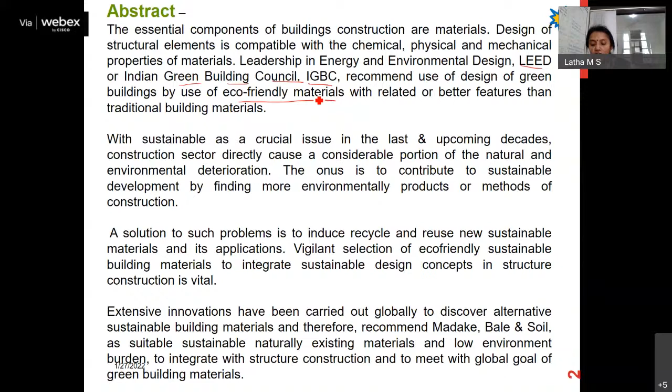Okay. My presentation is divided into 3 parts. So part 1 is with respect to Madake, or bamboo. Why this bamboo? Where has this bamboo come from? It's a plant which will absorb carbon dioxide and emit a lot of oxygen.

But it is not only the property of bamboo. It can be used as a construction material. So going with this, we have experimented for college institution, right? So the overview of the presentation is talking about all the parameters influencing bamboo usage for construction purposes, and how we can substitute construction material using bamboo.

Now, as you know, concrete and steel play a major role, because without concrete and steel it is not possible to go for any type of construction.

Sorry to interrupt, sir, there is an echo formation. Am I correct? Sir, there is an echo formation. Madam, please tell me. Echo formation. There's an echo. One second.

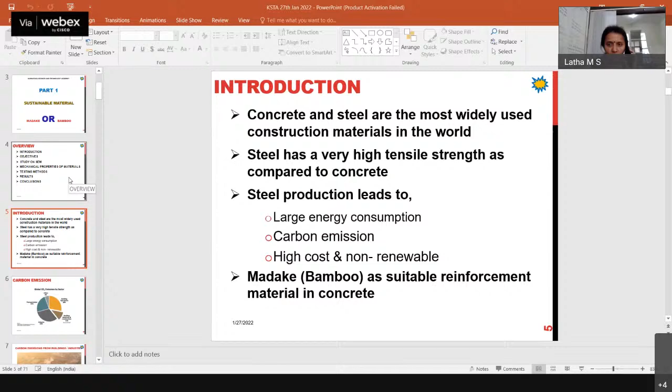Now coming to the topic of introduction, I was talking about concrete and steel, how concrete and steel play a vital role in carbon emission. Concrete consists of cement, aggregates, and sand. The cement is a major culprit in emitting carbon to the environment. And even the steel, when the production of steel takes place, during the process, you find...

Hello, sir. Okay. Okay.

During the process of steel production, you find a large amount of heat and environmental warming emitted to the environment, which is causing a high impact on the global environment. Though we know that steel has high tensile strength compared to concrete, we have to use it.

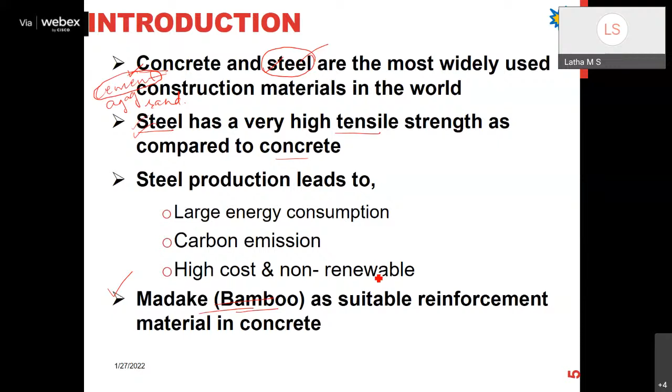But today in this generation, students, do we have a substitute for concrete and steel? Everyone knows concrete is emitting a lot of carbon, and steel is also emitting, but do we have any such substitute? Yes, of course we have. We call it Madake, or bamboo. Bamboo is a highly versatile material which could be used in place of reinforcement.

Coming further, now we can see this chart, comprising transportation, building operations, building materials and construction, and industry, and the amount of carbon emission being given out. Transportation is 23%, industry is emitting 32%, building materials and construction is emitting 11%, and building operation is 28%. Totally, you can see more than 70% of carbon is being emitted.

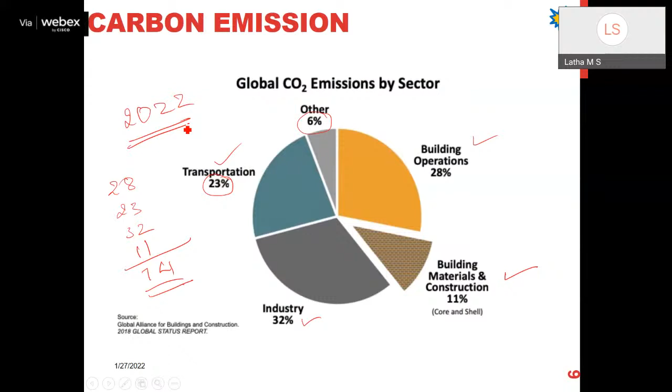So we have to think about how to overcome that and how to replace such a material. Not completely, but definitely a partial replacement is possible. Now we are talking about cement. You can see this is cement, you have a physical view also. These are the cement bags, and this is the cement plant where the manufacture of cement takes place.

So tons and tons of cement have been manufactured. At the same time, tons of carbon are being emitted to the environment. If I manufacture one bag or 1 kg of cement, it will produce an equal amount of carbon to the environment. This is a fact.

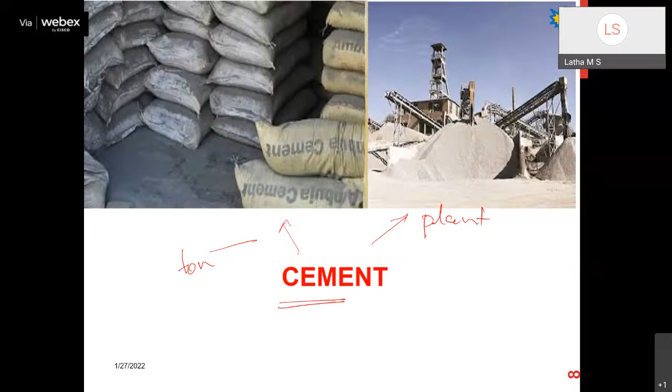Even now we can see this is a reinforcement. When I split this reinforcement, that means I'm providing a support to the cement. I cannot use cement alone for the construction. I should be reinforcing with the bars. These are the bars you can see - this is a reinforcement. A lot of cement bars are being used.

How is this manufactured? Is that readily available in the market? We pay and we get it, students, but it is not that simple - we have to look into the manufacture of it. It is very, very important. So to understand the manufacture of cement, manufacture of reinforcement, how much carbon is being emitted, we have to understand this.

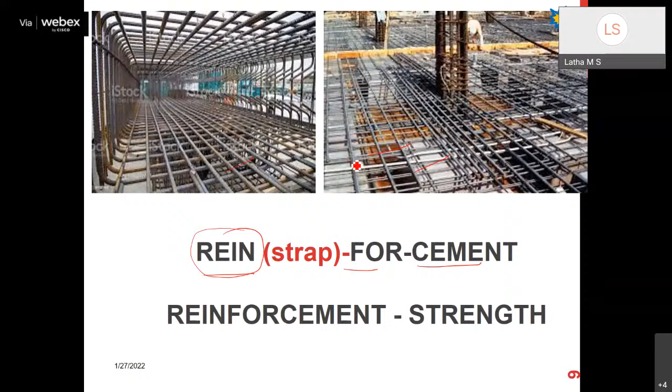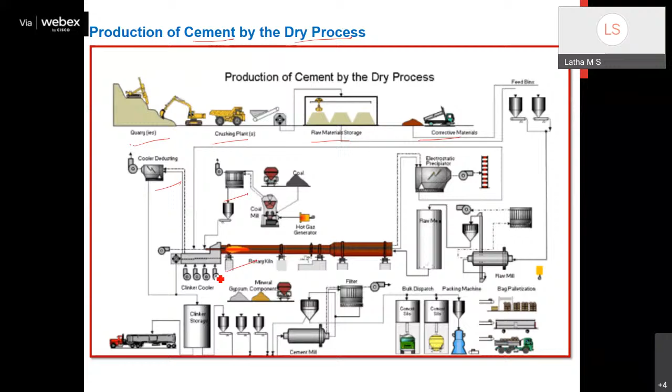Now this is a process telling about cement production. Cement can be produced in two ways, as a dry process. Whatever it is, dry or wet process, I'm not worried, but see the complete picture, students. You can see there is a lot of content involved - you have a quarry dust, a crushing plant, then raw material. Everything takes place, every setup has to be made, every equipment facility has to be made, and manpower is required. A lot of energy is required here to produce the cement.

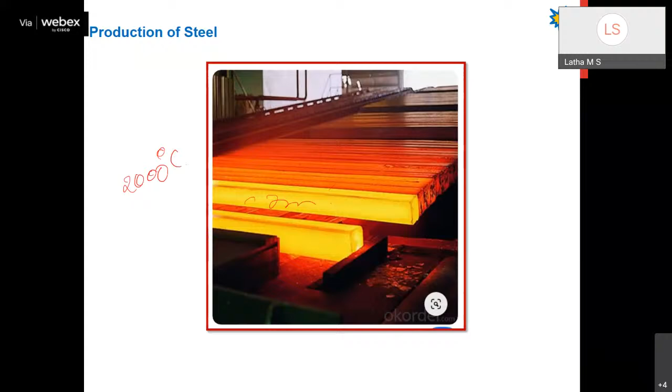So it's not easy for the steel to bend because of its high strength. So we have to bend, heat it to the molten condition - it will be more than 2000 degrees, more than that, then only it is possible to bend the steel, right? Similarly, you can see the operation in the steel production industry, where the person is standing here working, associating with the job to function for the manufacture of steel.

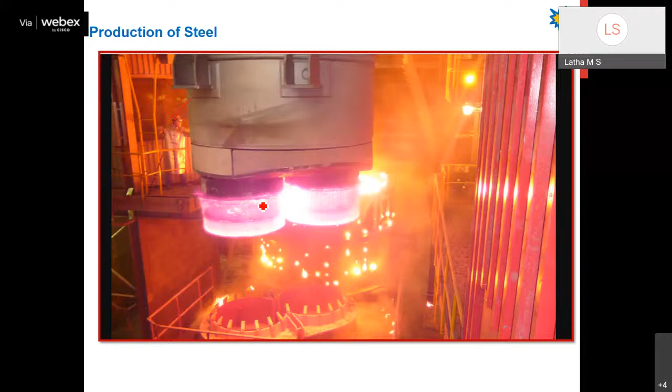So what we understood from this, finally, is that cement production and steel production involve a lot of energy.

How to overcome this? Yes, there is a natural material called Madake or bamboo. I'm not telling you that Madake or bamboo will completely take up the role - no, no, no, it's not possible like that. We have to partially replace it wherever it is possible.

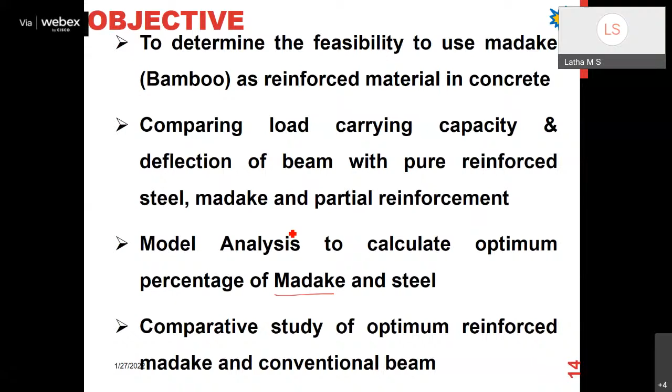Bamboo we cannot use as it is for construction, right? We have to test it. So this is a source I have taken from one of the literature available. The bamboo, in dry condition, will be cut into a piece of the required height, and it will be tested in the UTM machine, that is the universal testing machine. After that, the tensile strength will be estimated and put up across a stress-strain graph, showing that it has achieved a very good strength.

Similarly, when I say bamboo, you will have a mind that it is a wood material - yes, definitely it's a wood material. So for which we have to take the strips, cut the bamboo into strips and soak it in water. Just by soaking the bamboo in water as it is, I could find the water absorption to be 51.2%, which is very, very high to be used for construction purposes.

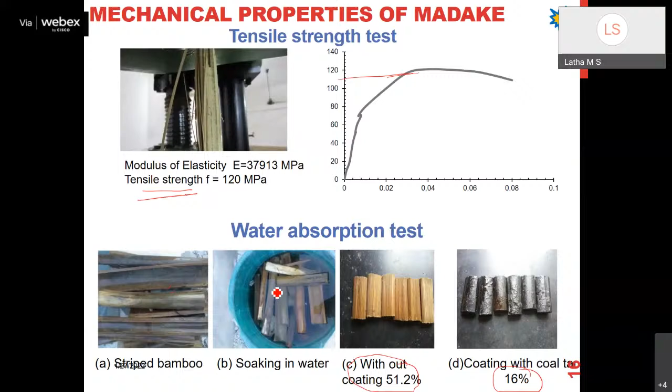This is a reference we took from the literature survey. A number of Indian standard codes are available with us, specifically IS 9096 and IS 8242, which indicate the best features of bamboo and the methods of test to be conducted.

Once I treat the bamboo with coal tar, what happens? The coal tar has some temperature within it, and this coal tar will make the cellulose dissolve. So you find a good layer being formed.

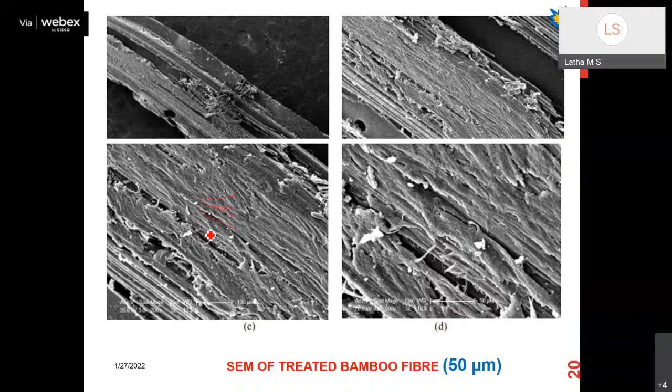So to overcome that, we started treating the bamboo, and these are the observations we made. Significant modification after treatment: the starch material in the cell cavity got dissolved, and the cell wall was intact. Intact means it will be strong. So this is a study we have made.

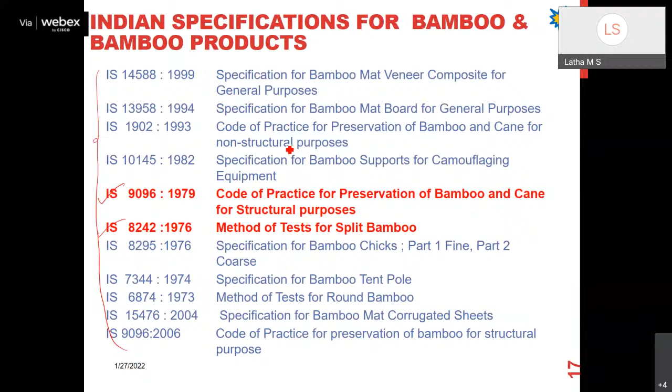So regarding bamboo: how we started collecting the bamboo, then we studied the strength of the bamboo, then we had to refer to the codes. It is not that easy, students, to just use some XYZ material and do it. No, no, no - we have to really investigate the material before using it.

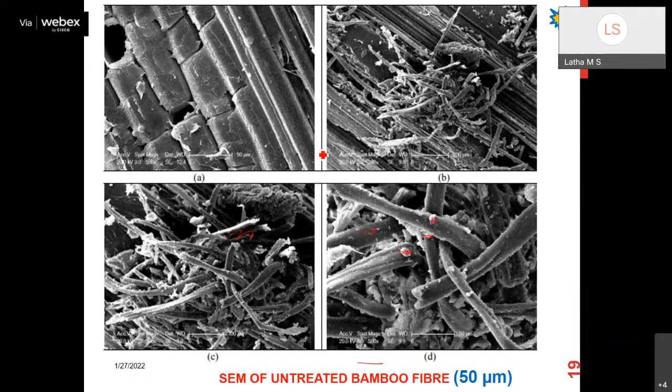Then we have to go for SEM scanning images, then we have to treat this cellulose - the treatment was coal tar - then we proceeded with the application.

So we made a collection of the required number of bamboos. One species was available - don't worry, any species can possibly be taken up, but it is on a trial and error basis.

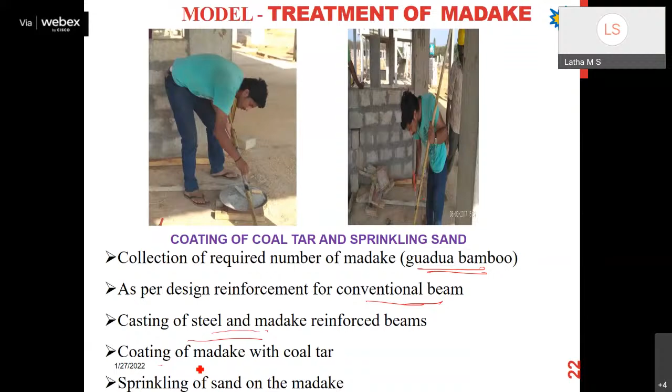Then we designed the beam, then started with the steel construction, then coating of Madake with coal tar - Madake is nothing but bamboo - then sprinkling of sand took place. This is the final version of the treated Madake, so this is what you can see.

Where was the bamboo? Bamboo was long back - this was the bamboo we could see. This bamboo has been changed into usable bamboo as a structural element by treating it with coal tar.

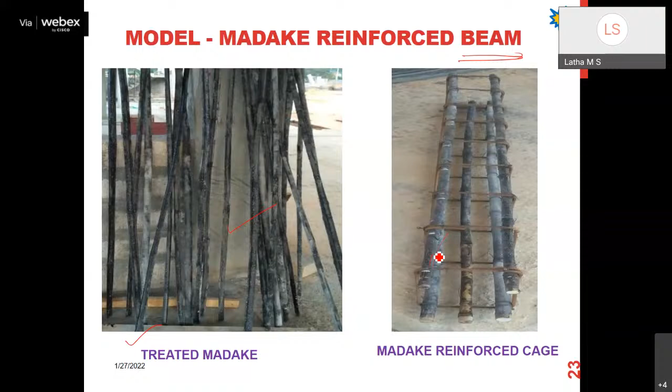By treating it, then we prepared the cage for the beam. You can see the solid bamboos are being used in place of reinforcement.

After this, we also have a comparative study with the ordinary conventional reinforcement. So you have two different types of reinforcement - one with bamboo and one with steel - so my study has to conclude while making a comparison. Any study, students, you take, you have to have a comparison with the conventional type.

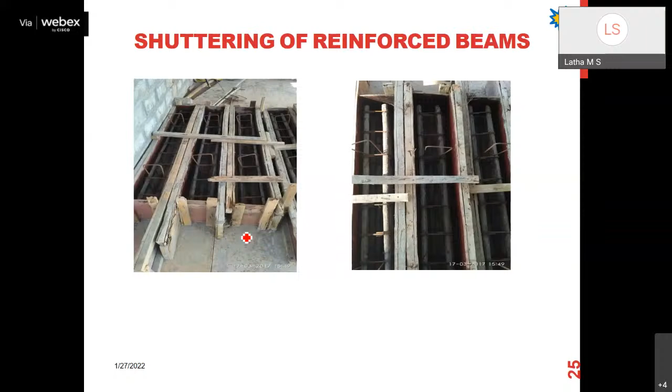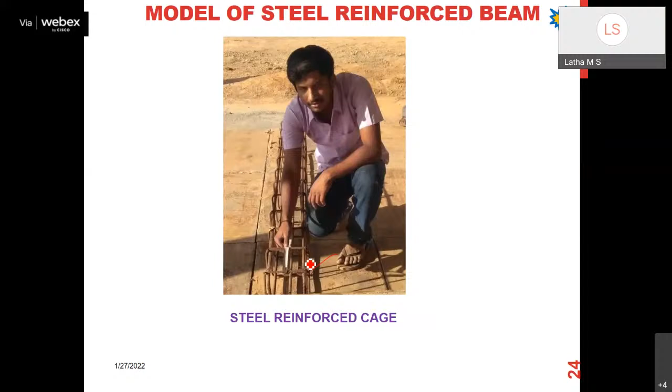It is not simply enough to say that bamboo can be used; we have to show how it can be used. So this is a beam which we have cast. Similarly, using bamboo as stirrups and using steel stirrups, we have cast the beams both with bamboo and with only steel.

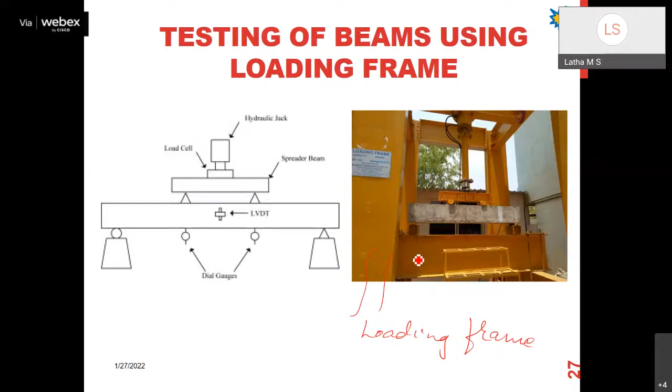Then after that, the process doesn't stop. We have to test and tell people what the bamboo is doing. So this is a loading frame, students, which will take the maximum load for testing. We can test beams, slabs, columns using this loading frame. So using this, we started testing.

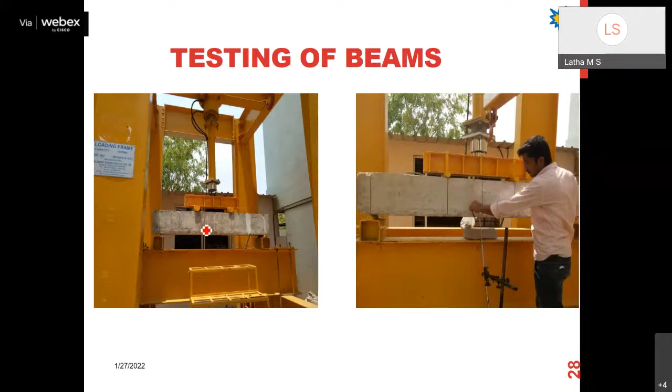You can see the arrangement made. You can see the student making the arrangement. It has to be centrally placed, symmetrically and centrally placed. Remember students, this beam is composed only of bamboo as the reinforcement, not the conventional steel type.

Now the load is being applied. You can see the failure has completely happened, very nicely, exactly the type of failure as steel would show. You can see here the bamboo is still intact here. Bamboo has not failed, it is still intact.

So it can take up the load even more, being intact. Now we have to proceed further. This is with respect to the bamboo cage. Now we have to proceed with the steel cage. Two types of studies we continued.

So a beam was cast using only the steel cage. Again, it was applied for loading using the loading frame. Then the failure pattern can be observed; it was all similar for both bamboo and steel. Both had an equal type of failure. Then a plot of the graph was made.

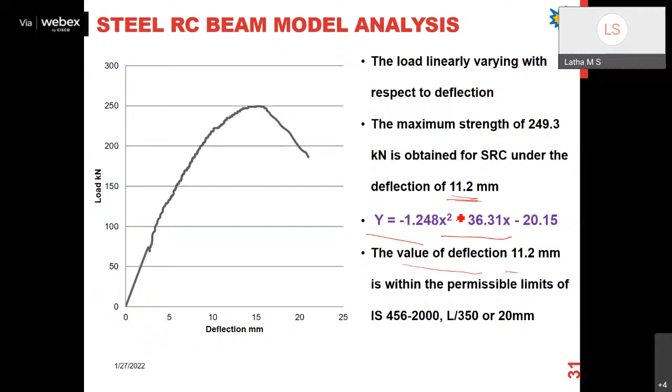Analysis was performed and the equation was derived, telling us the maximum deflection, because we saw the bending - it was bent, meaning deflection was happening. So what is the maximum amount of deflection? It is 11.2, which is within the permissible codes.

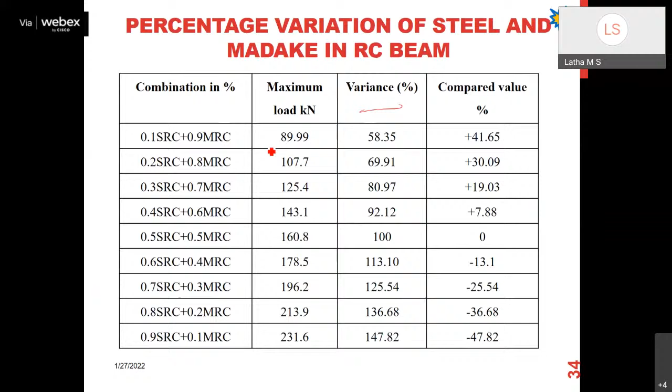Similarly, we calculated the deflection for load and deflection for steel. There we found the deflection to be 8.2. So a lot of analysis was performed between the two types, data was collected, we tabulated it, calculated the variance, the combination, and all that. We plotted the graph like this.

Varying the percentage of bamboo with the percentage of steel, we observed how it varied. There was different variation - different loads it was taking. So with this experiment, we can conclude that Madake, or bamboo, is recommended for use as reinforcement in concrete, and 30 to 50% of steel can be replaced. If I'm able to replace 30 to 50%, students, it is very good, isn't it? I'll be using only 70% steel, and the remaining 30% can be bamboo.

So this is a versatile procedure we can use for construction. We have to step ahead to take up the decision for the use of bamboo in construction. This is an application - it's a sustainable material. Bamboo is a sustainable material which is locally available and can be used directly for construction after some brief treatment.

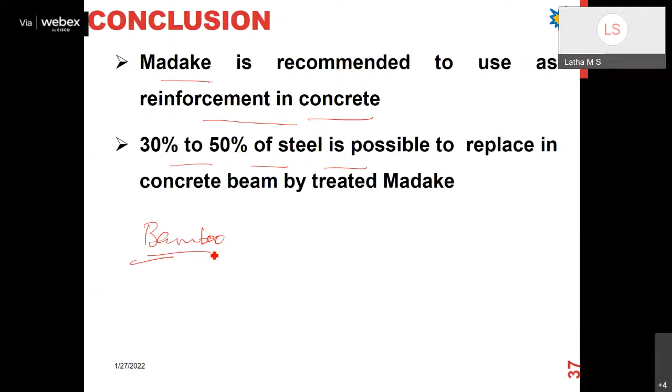Okay students, now coming to the next part of the presentation, which consists of bale and soil. What is bale? Bale is hay, hullu. Bale is nothing but hullu, hay. Then soil - both are naturally available, both are sustainable materials. Why is it sustainable? It will emit low carbon, less carbon, because I don't require any type of manufacturing process to prepare bale and soil.

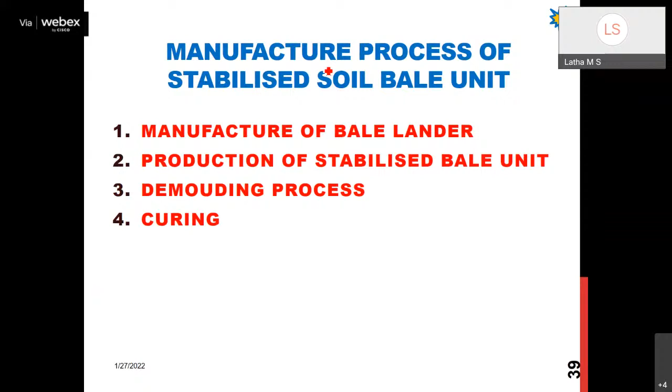The bale was freely bought from the agriculturist, the farmer. He was just giving it away because he doesn't want it. But the tensile strength of this bale is very good, students. So we thought, why don't we use this material in construction, right? So all of us started preparing the bale capsules.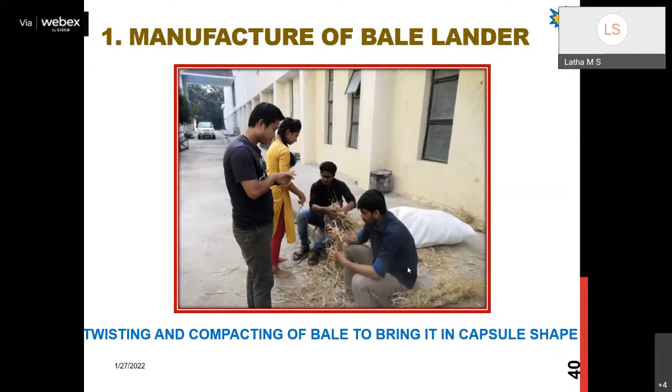Okay, so you can see this is the raw material. We are just twining it and putting it in the form of a bale capsule, right? And finally it was cut and the design was made such that it should weigh only 0.11 or 0.15. That is the maximum limit of the bale to be used in the blocks, right? Why am I using bale? It is to improve the strength.

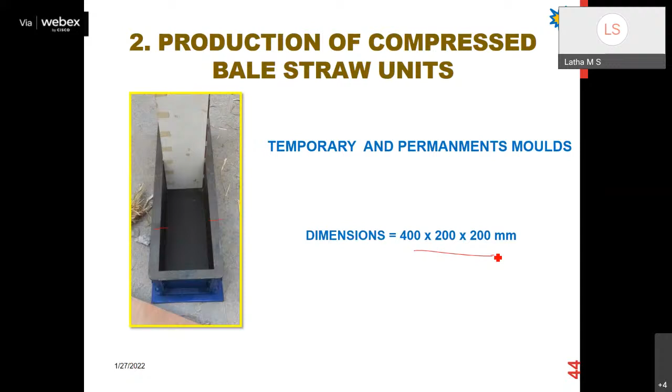And so this is the final output of the bale. These bales are ready to use in the construction or the manufacture of blocks. This is a final bale capsule. So once it has been made ready, we started with the mold. We have a mold of size 400 by 200 by 200. Here, very neatly, we took up the composition, students.

Here also, soil is being used, correct? And a minimum percentage of cement. I don't require 100% cement. I require a minimum percentage of cement. And you can see this is quarry dust, which can be used as sand, right? All three are being taken along with the capsules.

But make an observation here, students. We are using a very minimal amount of cement, right? But I'm using the available soil. The soil is easily available on the earth, and quarry dust is available. Even the byproduct of the quarry, I can convert into quarry dust and use it.

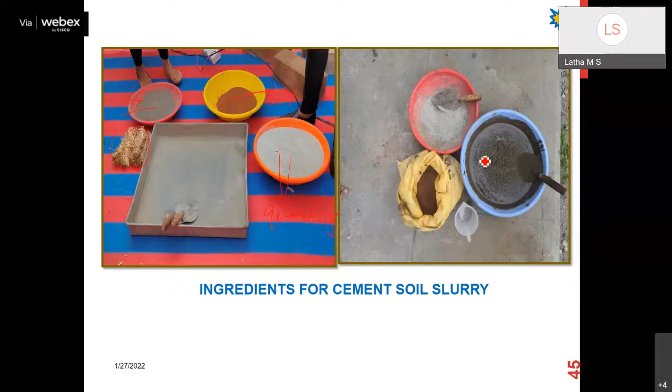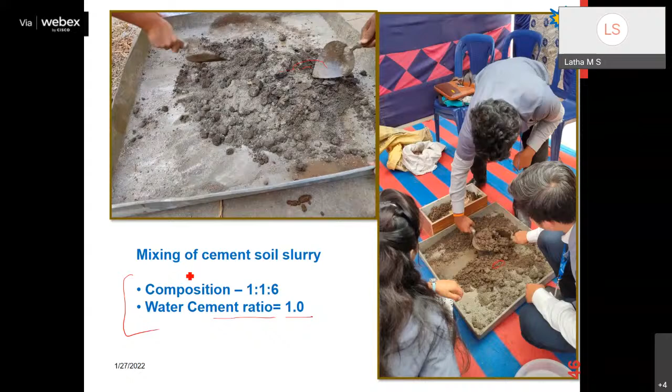Okay, so all three were mixed to form a slurry. Why? Because it should have a flowable type of mix. So you can see how rigorously we are mixing it. We are mixing here also, right? So the design gave a composition of 1:1:6 with a water cement ratio of 1. So you can see the cement slurry was prepared.

So we can see in the mold we poured the mix, right? By layers, we have to make the measurement. So the mold is of 200 mm height. So we place the slurry at first for a depth of 30 mm.

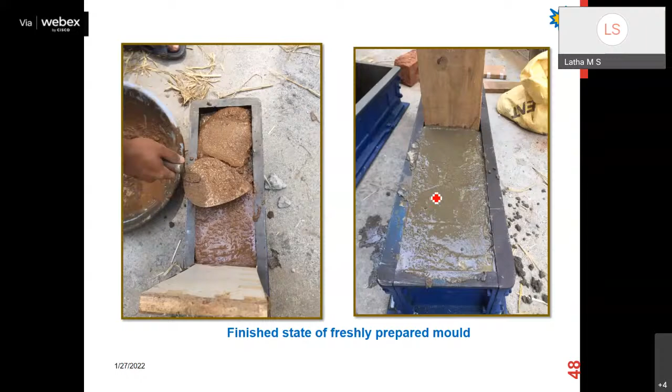Then after that, two capsules were placed, right? The bale landers are placed in 2 layers, capsules or bale landers, whatever we designate them. Okay, and after that the mold was completed with the remaining 2 more capsules, one above the other, and this is a complete finish. So after finishing and demolding, after 24 hours, we can see the block is out.

This is a block. You can see I didn't use much cement, and I don't require much time either. I need not wait for any equipment. I need not wait for any manpower. I don't want any machines. I will be using the existing materials, which are called sustainable materials.

And the carbon emission is very low because the cement percentage we are using is very, very less when compared to other types of construction. Whereas we are using soil and bale, which are plentifully available on this earth, right? So this is the final block we have seen.

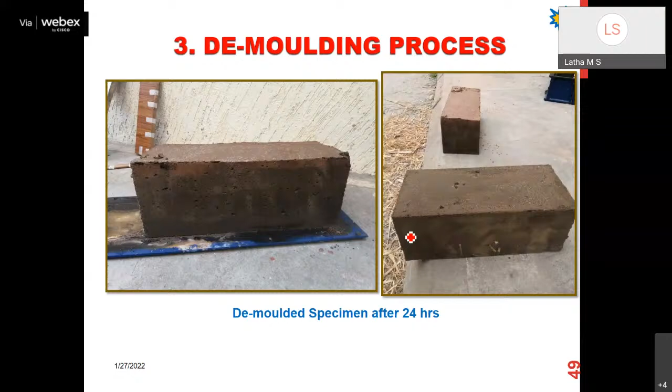Usually, whenever we use cement, students, we have to cure it for 28 days. How to cure it? Again, I want water to cure it. So what I did, this bale, or hay, whatever you call it, has a provision of pores, right? Within that, it can capture a lot of water.

So what we did, we made a bed of the bales, placed the blocks, right? And covered them and started sprinkling. Therefore, I'm reducing the amount of water. If I sprinkle once a day, that is more than enough.

Otherwise, you have to keep it in water, correct? If it is a concrete made up of aggregates, right? It is not at all a concrete. I'm not at all using aggregates, right? We have to keep it in water. Then I require manpower. All that has been reduced here, right? So this is a sprinkling process taking place, which is being covered by the bale.

Then after this, we have to test it, and right now we have patented this. We have kept it for evaluation under the patent for the process. It is a completely sustainable material. It can be utilized very nicely. It is having good strength, and it can be utilized for a temporary structure or

a major structure. I don't agree that you have to construct a whole building with concrete. You go for a part of it, 10% of it with these materials, 20% with these materials. See the originality, see the environment, right? When I use soil and bale, something like this, as a naturally occurring material in construction, see the environment.

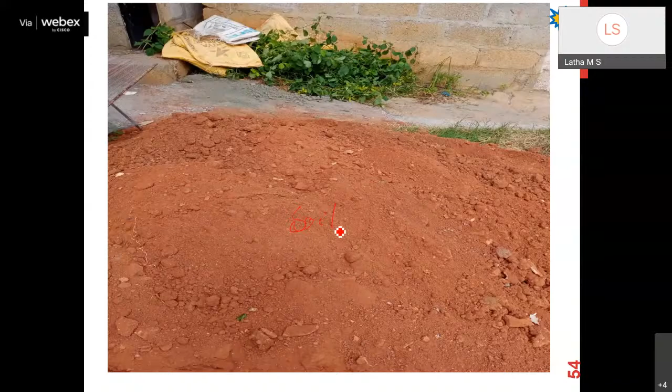To understand this environmental aspect of this type of construction, we have undertaken one more type of work as a project in the campus itself, which is called stabilized soil bricks. In stabilized soil bricks, as the name goes, soil. What type of soil should I use? I should use a soil which is red in color or black in color, any color. You can use any type of soil. But before using, we have to test it, right?

There are a number of tests to be performed for the soil, right? We have to sieve it, then test it for hydrometer analysis. Once the engineer approves this soil is ready to use, we proceed further. And you can see this is how it is being tested. This was raw soil as it is. It was available at some place. We got it from there, transported it here, and we have a yard here.

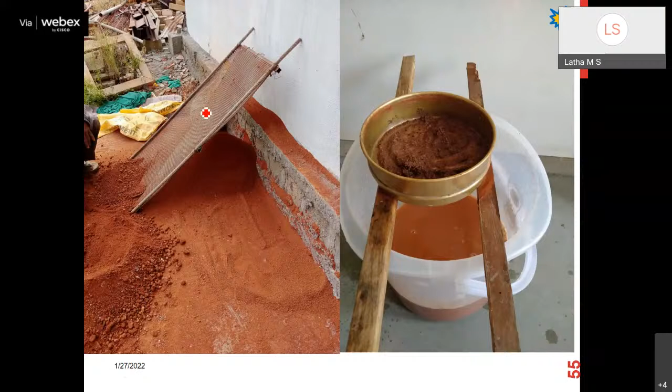We have loaded it, right? Then after loading, we have to use a sieve. This is called a sieve. You can see a person is being employed here, who is not educated. He is working very well and happily. Employment is increasing, therefore. So he is sieving the soil. This soil has to be utilized. Before it is utilized, you have to perform a test.

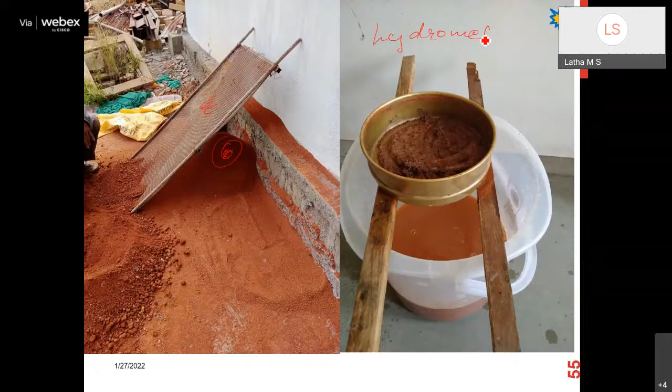This is a laboratory test which has been performed, called hydrometer analysis. In hydrometer analysis, the soil is passed through a particular sieve, and a certain amount of soil will be retained. Once the soil passing through the 4.75 sieve is tested again, it will be tested further to get approval to proceed with the construction of the brick.

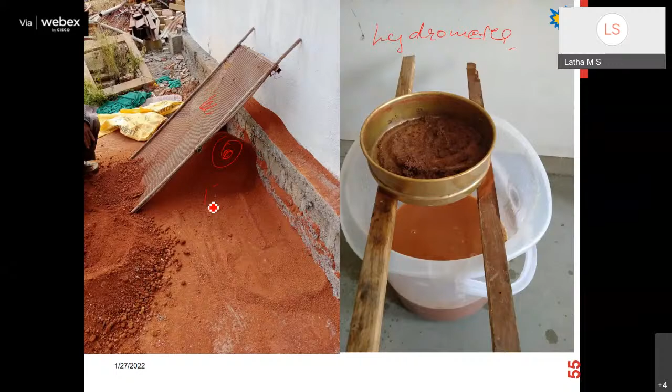Now you can see here soil, sand and cement are being used. So this is the soil, right? Once the soil is sieved, you get the soil passing 4.75 mm. This soil will be used, mixed along with sand, and a very minimal quantity of cement will be used. Therefore, what I'm trying to do is overcome the usage of cement. I'm using the soil, not the cement.

Earlier we saw, and today also, you just walk around the roads, you find every building is constructed with concrete, correct? Every building is emitting carbon. Students, construction is completed. Yes, it's completed. But throughout its life, the building is emitting carbon. So global warming is going higher every day. So we have to look at how to reduce it.

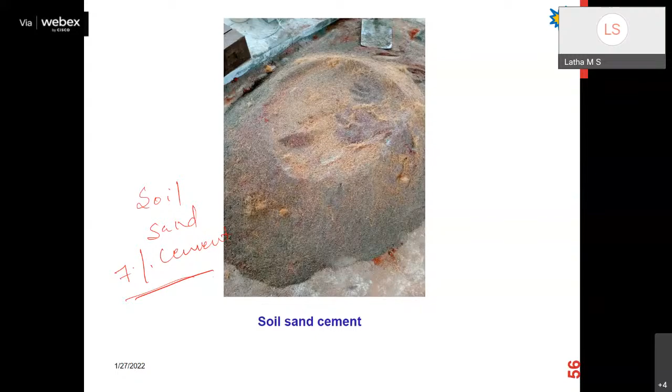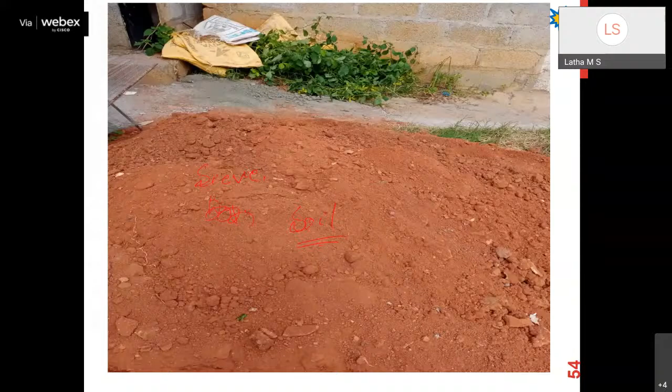Once it is mixed, depending upon the design requirement, you can add water. The required amount of water has to be calculated with the design. Then the water will be added. Once the water is added, students, we should see to it that it is being mixed uniformly and accurately. Accurately and uniformly it has to be mixed.

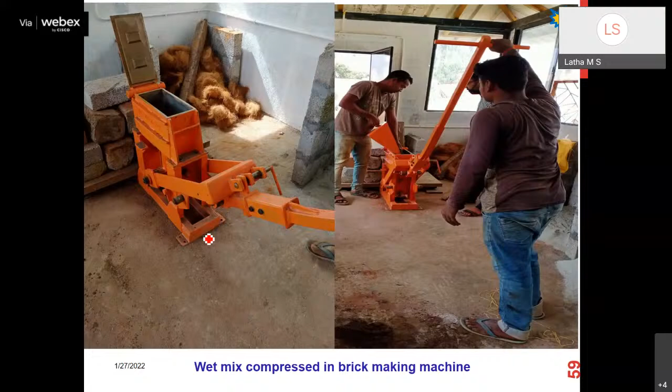Now we are talking about the stabilized bricks. To get the stabilized bricks, we own a machine. By the VGST approval project, we got this machine. We purchased this machine, which is generally called a brick making machine. The wet mix which has been mixed here will be taken in a quantity depending upon the design.

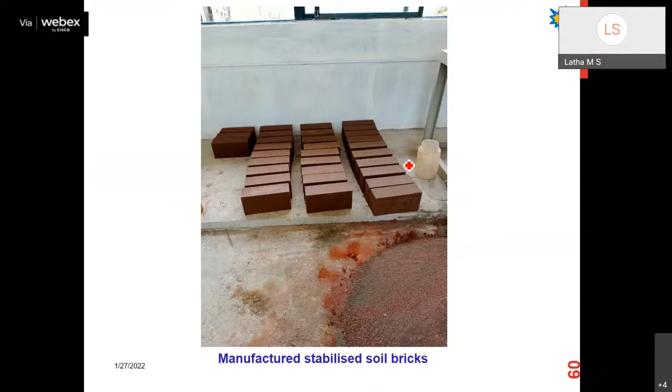You can see the team member is filling up this brick, and using his lever arm, the person will press down so that compaction takes place. Compaction means strength. So after pressing, you find beautiful bricks coming out, made up of only soil. See how beautiful the color is. It's a very pretty color of soil.

Where can you see the cement? The carbon emission is very, very low. See here, I'm not using any machines. I'm just employing 3 laborers. They are doing the work; no machines or equipment are required, no transportation of materials required, nothing. A very simple mechanism of producing stabilized soil bricks.

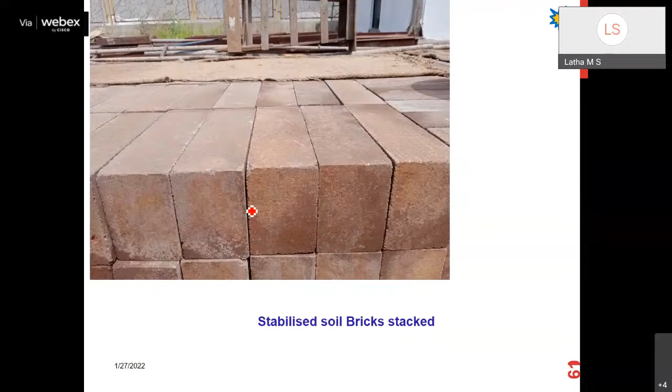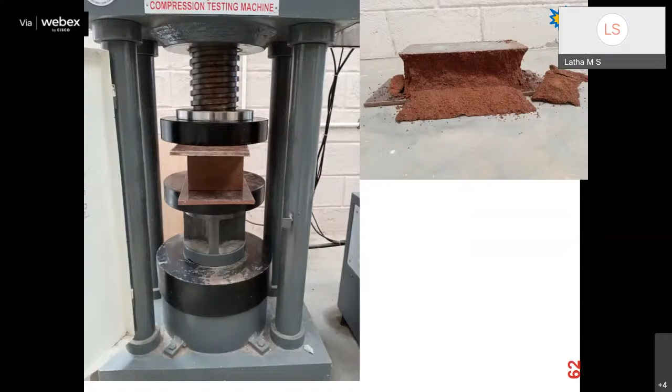You can see a number of such bricks have been manufactured. These are stacked bricks after 24 hours and after curing. A number of bricks are being manufactured in the campus for the same purpose. After manufacturing, it is not possible to use them as they are. We have to ensure that the compression results, tensile results, water content results, all should be within the permissible limits of the IS code.

So this is a compression testing machine. You can see the load is being applied, and the strength is very good when compared to burnt brick. Burnt brick will give 7 MPa as a strength. These stabilized soil blocks are giving a strength of 10 MPa, which is very good when compared to ordinary bricks. And a lot of construction has taken place.

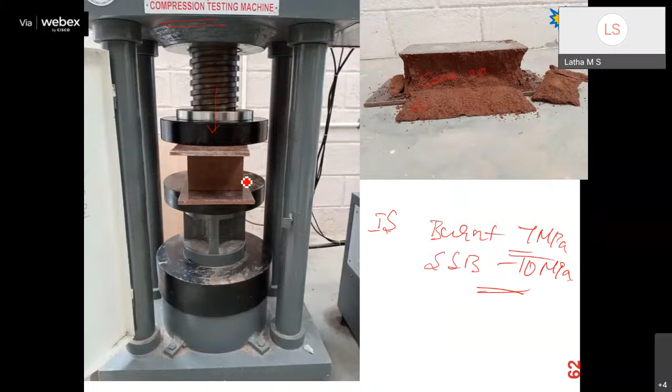So when I test it, if I open the first layer, you can see it's complete soil. The soil is as it is. It is not being eaten away by the cement. It is available in nature. I can reuse this material. I need not throw it away in the dustbins. I need not demolish it. I can reuse, recycle. I can crush it once again and reuse it for the manufacture of the block. So a very good property of stabilized soil blocks.

Now, after this block construction, our students and we all planned a project to study the environmental aspects: the room temperature and the outside ambient temperature. So we started constructing two model houses. One model house was constructed with stabilized soil blocks, and the other was constructed with burnt brick. We were studying the comparison, how it will behave with the environment.

So now you can see this is a complete model of the stabilized soil block, and this is burnt brick. We started measuring the temperature within the small model room. The observation was carried out for more than 3 months. We wanted to study the temperature.

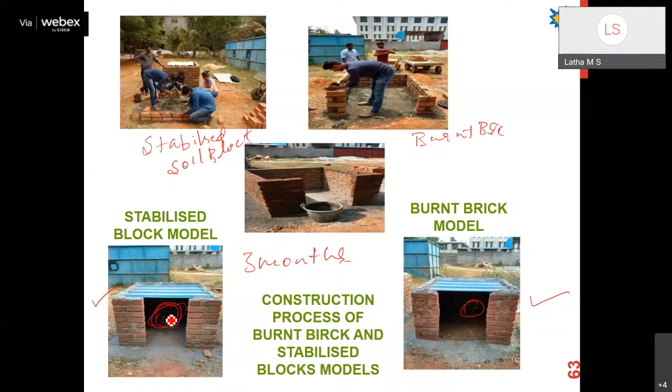As I said, a complete house need not be constructed with such stabilized or sustainable materials. We can also go for a portion of it. How it behaves, we have to understand. So we studied the environmental aspects. We recorded the temperature on a daily basis, every day at different intervals. It was not recorded just once per day.

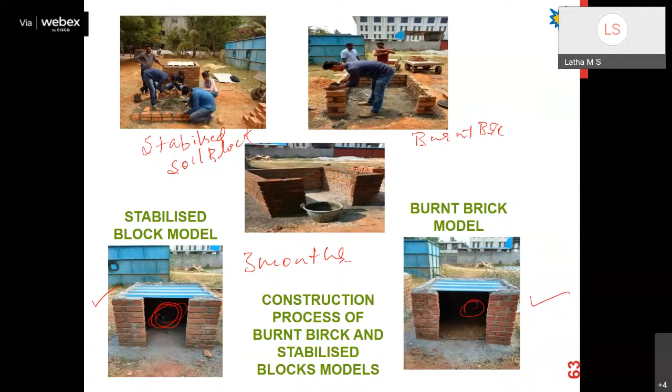Now we can see this type of bricks can be utilized for the construction, not as a whole, but in part. Similarly, what I said about the bale blocks, what we discussed here, the bale blocks have a very good insulation property. Even the temperature effect has been introduced here, and it can be very well used for poultries, because we are using the bale which will give us a good temperature within the room.

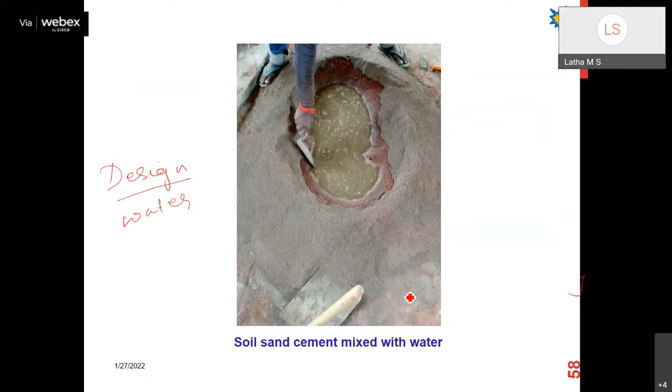So one is a temperature insulator, one is maintaining a very low temperature compared to the bricks or the ambient temperature. Such comparison has been made, creating an awareness that yes, you can use stabilized soil blocks, and they have very good strength compared to burnt bricks or solid concrete blocks, right? Because in the manufacture of solid concrete blocks, students, you find cement is required. So think of rooms constructed with stabilized soil blocks and concrete blocks. You can see the difference.

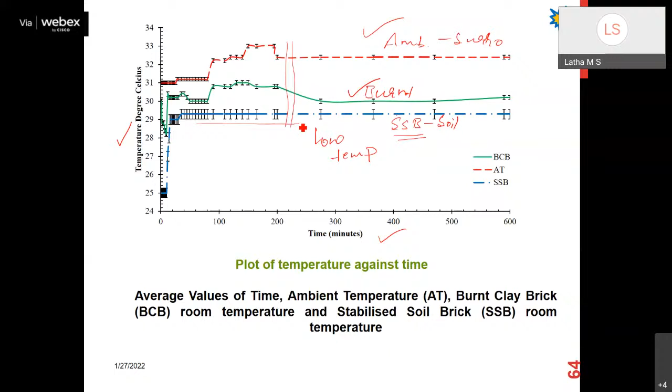The concrete blocks will be emitting heat throughout the day. Therefore, you'll be using your fans, your AC, am I correct? Or the cooler to reduce the temperature. In case of stabilized soil blocks, you need not. That itself will keep the temperature low. That is what we can understand from this graph, right? And we should all say yes to sustainable materials in construction. Do you have any doubt, any query? Let us discuss now.

Thank you very much for a very scholarly and informative talk on alternative materials. Yes, sir. Thank you, sir. Most of us are not from an engineering background, but I understood what you told. A lot of messages for all of us. I'm sure students will be interested to pursue their research on sustainable materials in future.

True, sir. They can always come forward and work on these types of materials, come out with very good results, which will really help the nation. We have to reduce the carbon emission to the environment. That is the motto of today's generation. Carbon footprint we have to reduce by using sustainable construction material. Yes, sir. There are one or two questions.

Madam, compared to the burnt brick, the stabilized brick you told about, does it have the same strength or even better? Even better, sir. Stabilized soil bricks have even better strength. How is it better? For example, the weight of one stabilized soil block will be 9 kg, but a brick will not have that weight.

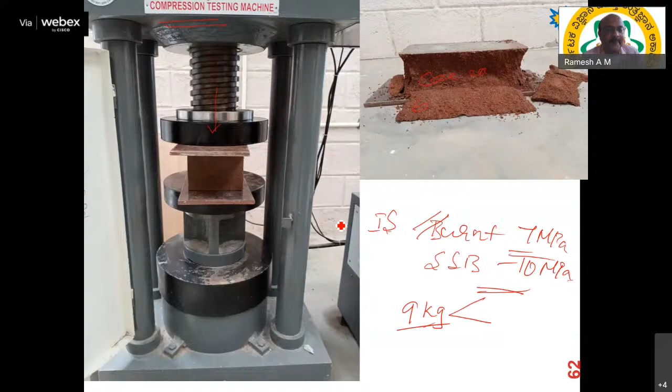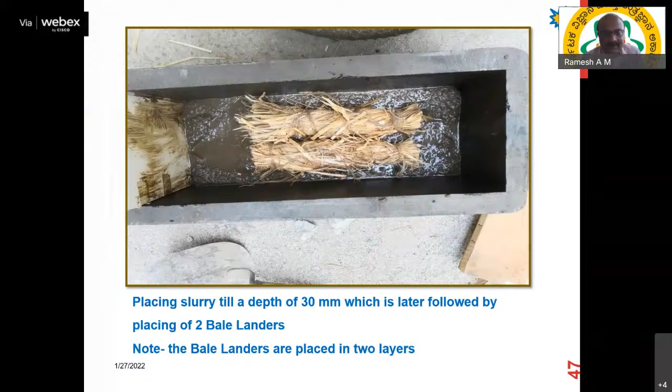Madam, when you use bamboo along with iron, will the quantity of cement that you use for construction reduce, or will it be the same? Sir, in the case of bamboo, we have to look for the replacement of steel reinforcement. You are right. Steel reinforcement, correct. Any idea about quantity of cement if only iron is used and if iron and bamboo are used?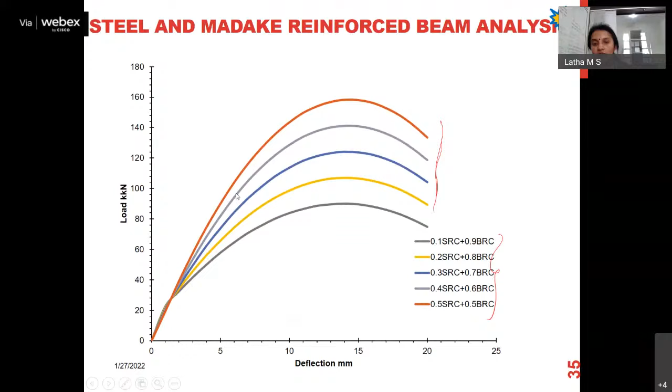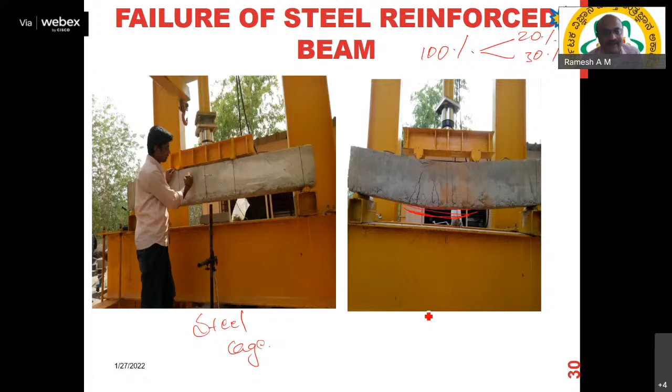Sir, there is always a possibility to reduce the cement by replacing a small portion of cement by soil. A suitable soil has to be included. Not that I should use 100% of cement. I should replace it by 20 or 30% of soil. That is the maximum allowed. Yes, sir. Earlier, our ancestral houses used to be made of bamboo and soil only. Yes, sir. After 300 or 400 years, the cycle repeats.

But today, bamboo is a versatile material, sir. We are not having that awareness. We can readily use it. Only we have to treat it and use it. That's what I'm telling to every public. The whole construction or beam construction need not be replaced 100%. Only one part, one beam or two beams, three beams, which take less load. If the owner of the construction is worried about the strength, he can definitely go with the replacement of one beam or two beams, sir. Not all.

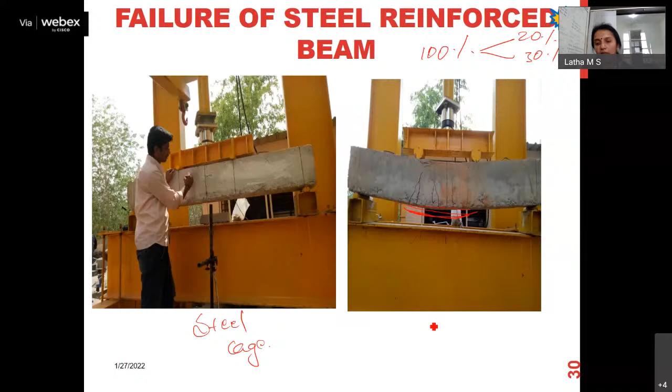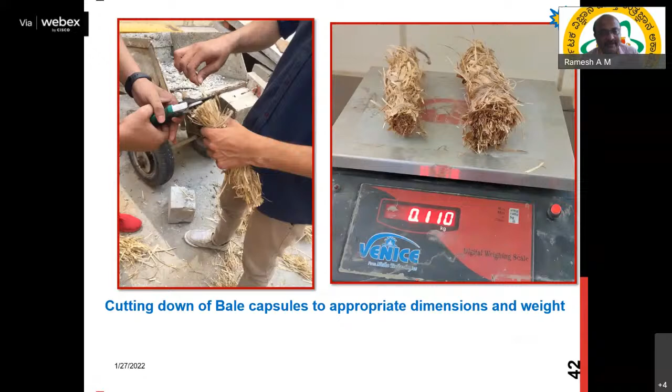And one more thing, is there any temperature difference between the building constructed only with iron and the building constructed in part using bamboo, madam? Temperature, sir. If I'm using bamboo with cement, there's no variation, sir. If I'm using the beam construction along with bamboo, soil and cement, the temperature will reduce. How it will reduce, I'll tell you, sir.

The soil has an intact clay content. The clay content can imbibe or absorb some amount of moisture. This moisture will be available, but it will not damage the structure. This moisture will give a very cooling presence in the building. So only using bamboo and cement, the temperature will not reduce, sir, but I can assure the replacement of reinforcement. If I'm looking for temperature reduction, then I have to replace cement with some amount of soil. That is possible. Therefore, the temperature reduction may happen, sir.

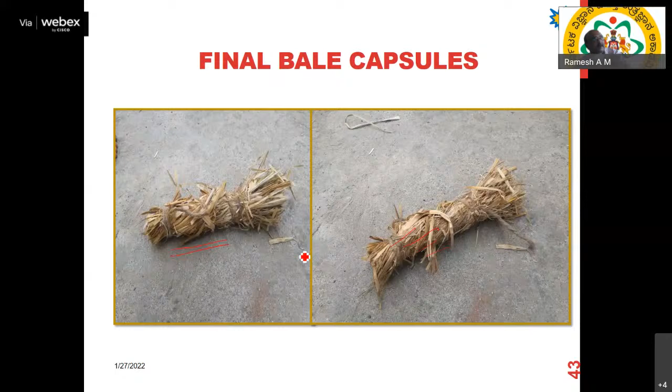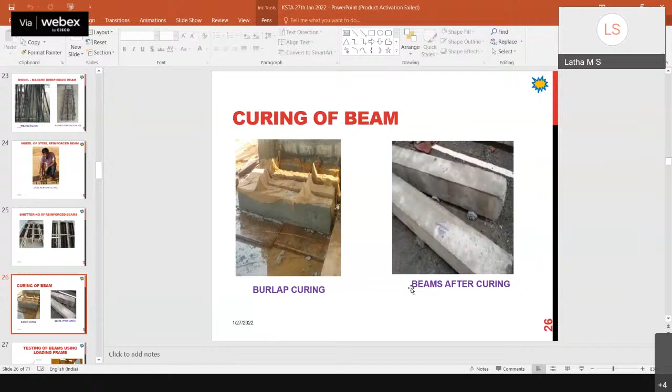Am I audible now, sir? Yes, madam, audible now.

So I was talking, if I'm taking a 20 mm dia bar, in place of 20 mm, I can take a 10 mm dia bar. Right, sir? Yes, madam. Hello, madam, audible. Please continue. Hollow bamboo. I'll be using hollow bamboo. So therefore, I can reduce the amount of steel.

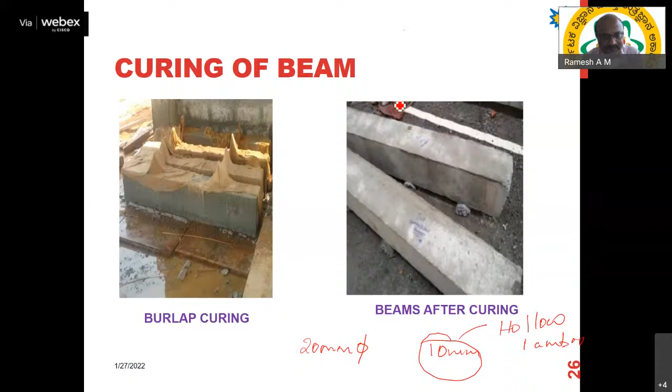Yes, madam. But there may be one problem. Is bamboo cutting allowed by the forest department, or are there some restrictions? No, no, sir. In the market, it is available, sir. You find dealers with bamboo supply. I was under the impression that there is a restriction on bamboo cutting in forest areas. Yes, sir, you are correct. But we are not going to the forest area, sir. We are meeting the dealers who sell these bamboos. We purchase from them.

So, there are different diameters of bamboos available, sir. Hollow bamboo, solid bamboos. Varying diameters are available.